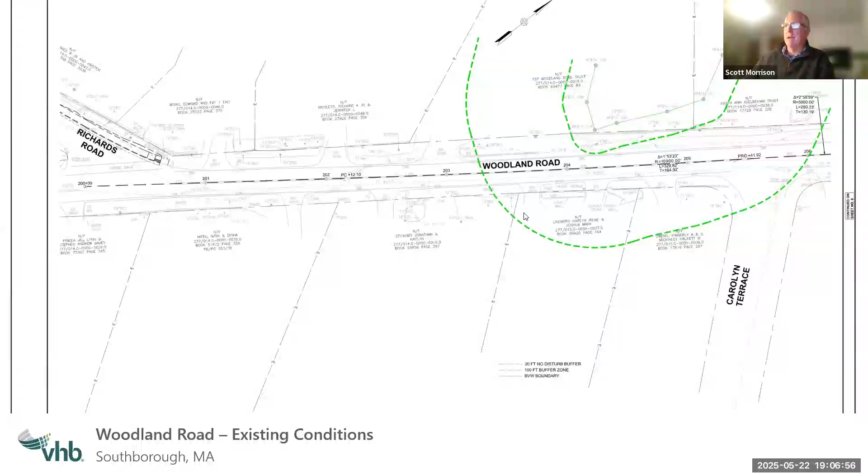So the work consists of construction of a sidewalk connection from Richards Road, crossing Woodland Road, and then running along Woodland Road up to Carolyn Terrace. So they'll need to do some improvements to the driveways and, obviously, construction of the layout of the sidewalk.

It should be noted that we need to provide updated plans, but within the buffer zone we've shifted this sidewalk slightly further away from the roadway so there'll be a grass area in between. The intent was to save some of the trees located along the edge of the road. So they'll need to install the sidewalk, and then these sections of the driveways will be saw cut and replaced to make sure it's accessible.

So that's essentially the relatively simple project. This one, again, is just the buffer zone project. I'd be happy to answer questions if the commission has any at this point.

Thank you for sharing this. I live on another part of Woodland Road, so I was able to drive by and try to understand what's going to happen. I just want to clarify, when the sidewalk crosses over what looks like a driveway, when people are driving out of their driveway, they're going to drive over the sidewalk, is that right? Essentially, the sidewalk will be shaped so it slopes into the driveway. The driveways will be saw cut and the pavement replaced to match the elevations of the sidewalks to make sure it's ADA accessible. But for all intents and purposes, it'll just look like an asphalt driveway to each of these homes. Thanks for the clarification.

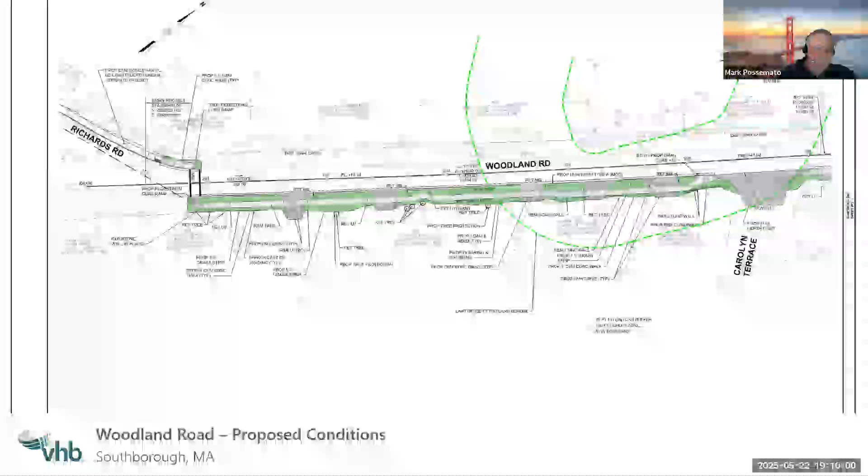All right, so we can talk about this a little bit in a continuous fashion. I'm going to open up 7:10, notice of intent, Richards Road. So, in accordance with the Wetlands Protection Act, Mass General Laws Chapter 131 Section 40, the Southborough Wetlands Bylaw, the Southborough Conservation Commission will conduct a public hearing on Thursday, May 22nd, 2025, at 7:10 p.m. by a virtual Zoom meeting. The commission will conduct a notice of intent for a project located within the right-of-way along Richards Road, between the intersection of Cordaville Road easterly to Woodland Road. The applicant, William Cutoff, Southborough DPW. The project description is the installation of a sidewalk along the north side of Richards Road.

Does anybody have any specific questions regarding this section of the project? If not, I'll switch over to the other slide deck. Well, I kind of do - is the intent to have these done at the same time? That's likely, yeah, Greg can jump into this. I would assume that would be the intent, but we had these separate, just in the event they got bid as separate projects and ended up with separate contractors.

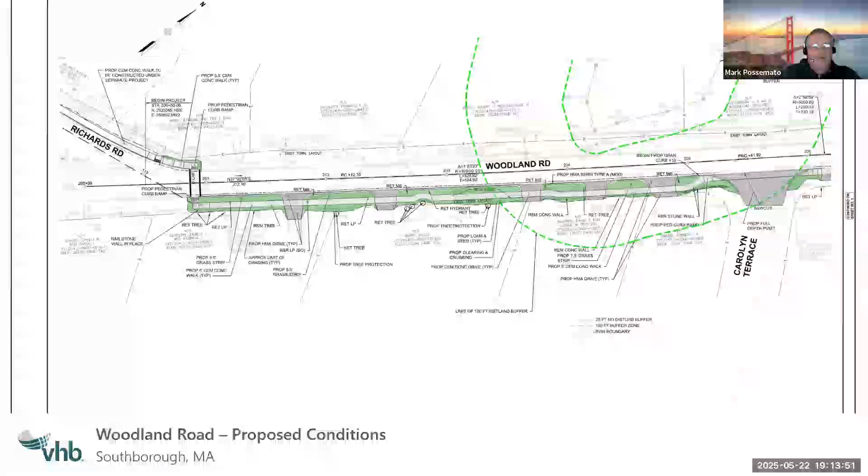There is an existing crosswalk at Woodland, on the west side of Woodland, so we could potentially end it there and the one on Richards there and carry on, or vice versa. Or build one and never build the other? I don't think that's the intent. But yeah, I get that, but things happen. Oh no, I understand.

All right, so that's why I kind of want to talk about them together from my perspective. But if you want to go ahead and present the Richards piece, or if any other commission members have anything to ask with respect to the Woodland piece, I guess you can do that now, and then we can hear about the Richards piece.

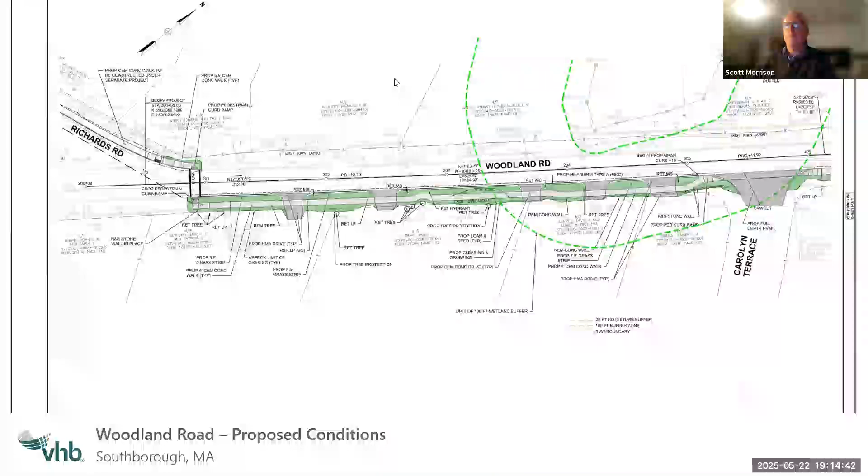So again, the Richards Road is an extension from the existing section. Sidewalks again provide a safe place for pedestrians. The proposed sidewalk will be on the north side of Richards Road from Cordaville Road to Woodland Road. Additional crosswalks connect the sidewalks on Cordaville Road and Richards Road. The sidewalk network will lead to the Mary E. Finn School.

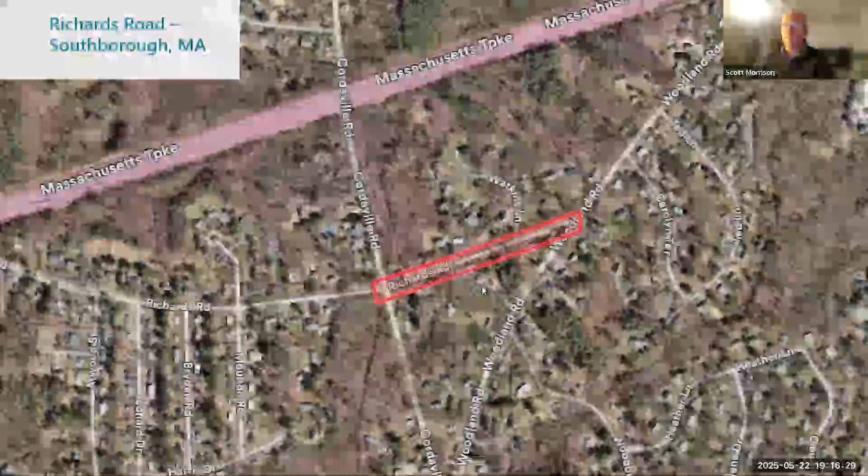So getting to the project layout, again, the section we just talked about is Woodland Road here. This will connect from Woodland Road down to Cordaville Road with some existing sidewalks through here. There are two perennial streams. One you can see flows down, comes through at this intersection and continues on. There's a second stream that cuts through and comes out this way and continues on. So those are the two wetland resource areas we're dealing with here.

Just to get you oriented, this is Richards Road here, Cordaville Road. So we've got a perennial stream that crosses this intersection through a culvert. The second stream flows through a culvert and is piped down and discharged in this vicinity.

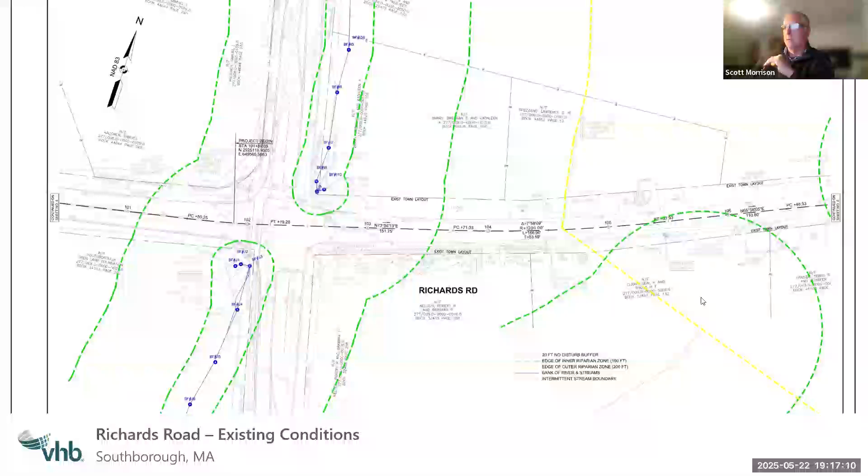One of the comments in the peer review comments was requesting that we add some flags in this location to identify the specific area that was done. We'll provide those on some updated plans, but I can go through the process here.

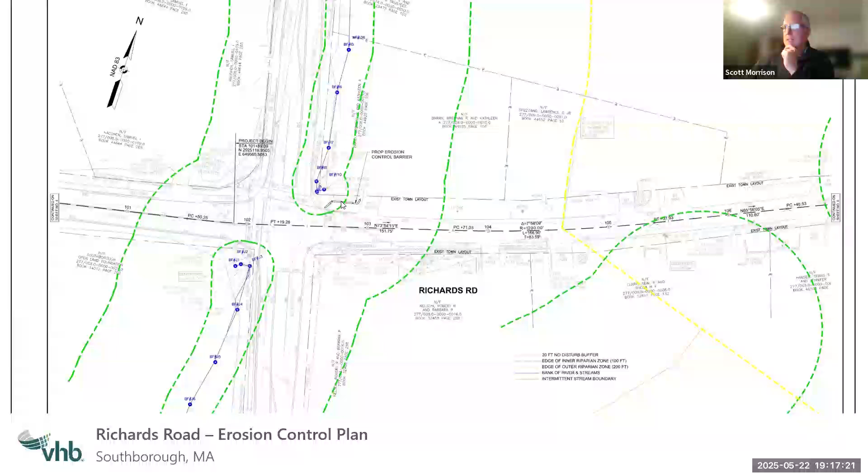So we'll have erosion controls consisting of straw wattles and silt fence barrier at this intersection to protect this wetland resource area here.

The project will consist of crossings, a section of sidewalk, an additional crossing across the road, and then sidewalks along the northerly side of Richards Road here. There is a small portion at this intersection that's within the town's 20-foot setback required to get this sidewalk crossing at that stop sign there.

There's also another section, a very small area of impact within that 20-foot zone. We did request a waiver based upon review of the bylaw - it's allowable for a waiver if the action is in the public interest and not inconsistent with the intent and purpose of the bylaw.

So again, these areas where we're proposing sidewalks, the vast majority are kind of roadway shoulders that are either gravel or a combination of gravel and grass along the edge of the road.

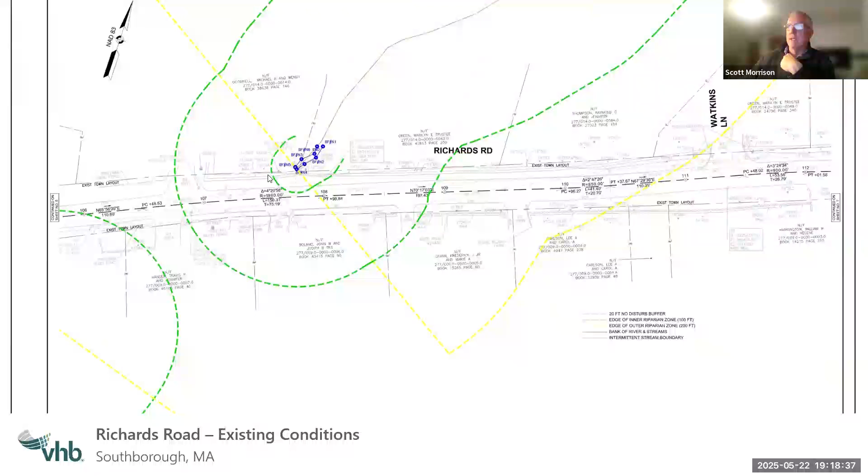The second stream, as I described, flows through into a culvert, crosses, comes down, and then discharges over here. So again, we'll have erosion control barrier along the edge of the roadway here. There's an existing retaining wall along here too, which will also serve to protect that resource area.

So the proposed work within the buffer zone will consist of reconstruction of a portion of an existing driveway, and installation of the sidewalk, crossing through. So all the work would be located within either the riverfront area or the 100-foot buffer zone in this particular project. I'd be happy to answer any questions.

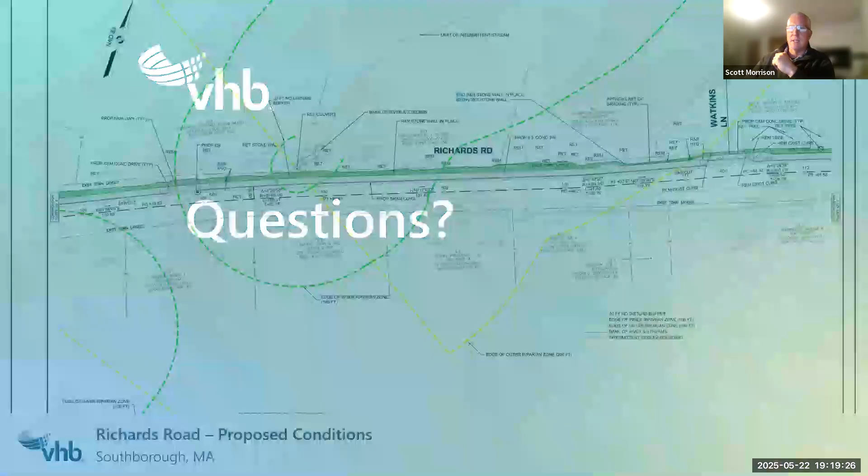Again, we don't have a file number, so we need to continue. We've got a handful of peer review comments to address, mostly regarding the numbering system or the flags. We'll make those corrections and get you an updated plan before the next meeting. But I'd be happy to answer any questions the commission may have.

Okay, thank you. I'll open it up to any questions the commission may have here.

So I had a question on the eastern stream - I saw that was just labeled as intermittent, but in the write-up it was described as perennial. Is it? It's mapped perennial - we'll make that update to the plan sheet. I think looking at it, I suspect this may in fact be intermittent. There's just a trickle of flow now, but because it's mapped, it's presumed a perennial stream. So we'll update the plans and address that. Okay.

Do you believe the mapping may be incorrect? Well, the mapping comes from the old USGS maps, so if it's mapped perennial, it's presumed perennial, unless deemed differently by evidence. Yeah, and for a project like this, it's not worth prolonging the project trying to document the stream being dry. There's a limited project provision that allows for roadway improvements such as this, so it's not important to the project and not worth a delay and extra effort. Okay.

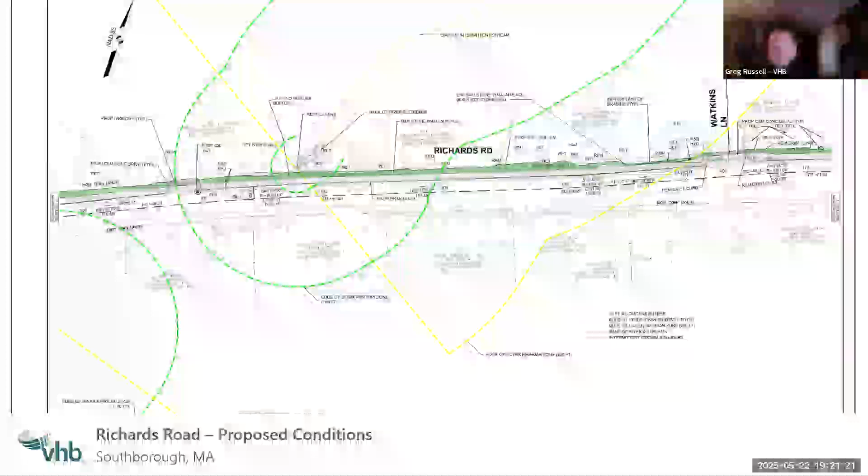Once you have all the permitting in place, how long would it take to complete the project? Construction-wise, once a contractor is selected and mobilized, probably both of these, you're talking a couple of months. Thank you.

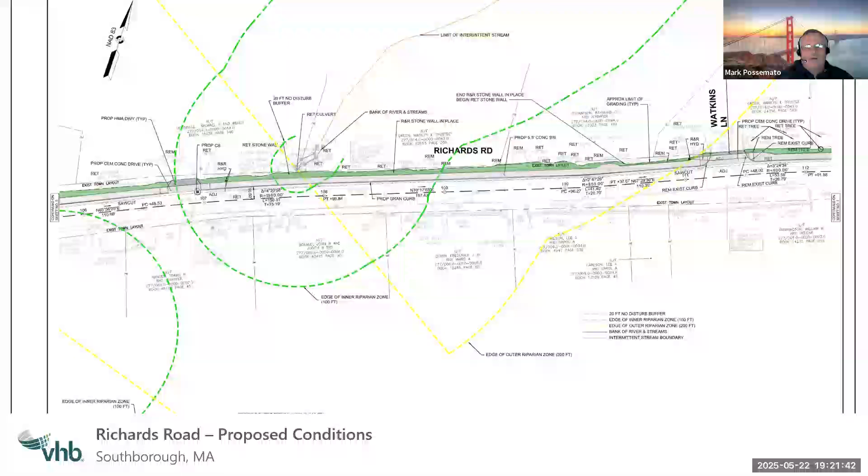Our consultant from Lucas Environmental, any comments here that you want to provide or add? Maybe just briefly touch on a few things.

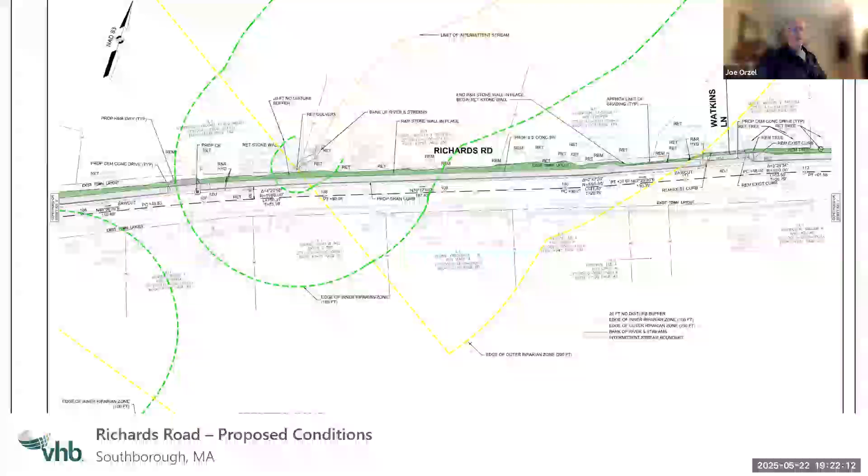As was noted, the culvert end and the southern portion of the stream that's showing now is closer to the road than what was estimated on the plan. And it appears that it would make the distance between the culvert ends less than 200 feet. Therefore the riverfront area would not be a straight line as indicated on these plans, it would be continuous. That would just impact the riverfront area of the site, and the riverfront area being impacted.

As we noted, there are a number of issues with the flagging. The locations were generally okay, I just mentioned it makes it difficult for me and more time consuming to go searching for flag numbers that are non-existent, and trying to figure out which flags correspond to the flags on the plan.

With regard to Woodland Road, I think the primary item I would like to mention is that there's an area not shown on the plans, which appears to be an isolated vegetated wetland that actually occurs in lawn area near I think it was 129 Woodland. It's mowed lawn. At the time I looked at it, it had at least a foot of water standing in it, and it was approximately 500 square feet of ponded area.

It does have hydric soils. There is a constructed swale that sort of goes between that area and the catch basin, but it's kind of an odd situation where the swale is actually up gradient of the pond, so I don't think that swale would be considered jurisdictional in any way. But it would include some additional buffer zone on that portion of the project.

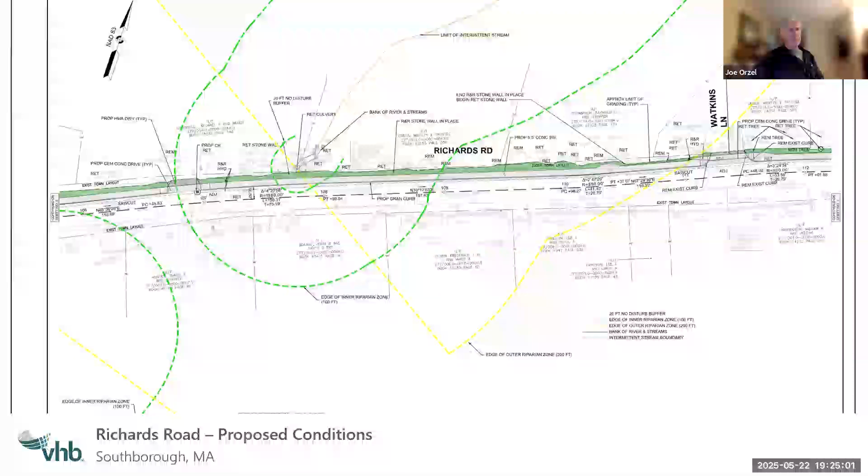I think other than that, just generally, there were some comments on providing some information, maybe just some information on alternative analysis on why the work could not be moved outside of the 20-foot no-disturb zone. It may be obvious, but it may not be. I think just a little narrative on that, or a little discussion on why that couldn't happen, would be good for the record.

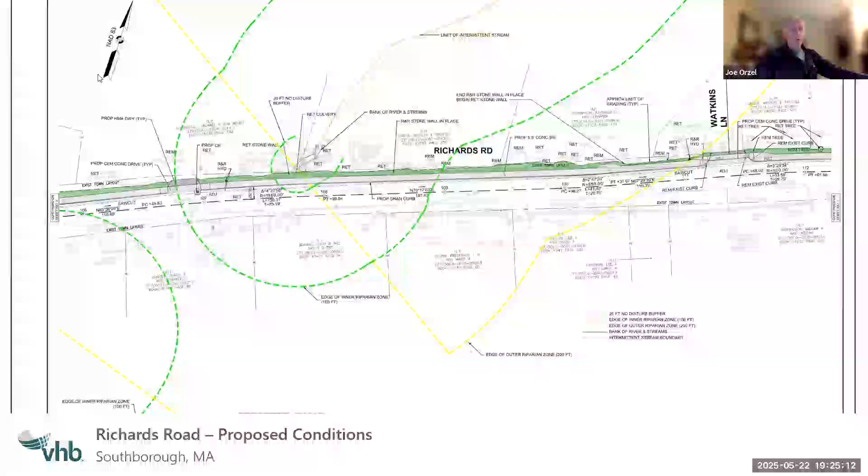Yeah, we can provide a narrative, but if you look here, the intent is to try and, for safe pedestrian passage, it's best to do it at a traffic signal. So if we were to pull this back, it would essentially be in a location where you'd have cars stopping, which could perhaps create an unsafe situation. And this is a traffic signal, so it needs to be within a certain distance of the traffic signal.

So that was kind of the main reason why it's up there, and then you start getting into the driveway as you start moving closer to it. So that was partially why we kept it there. Ideally, we could have kept it on the other side, but the south side is where all the utility poles are, there's several larger trees, stone walls. It seemed after going through it and with the grading that it made the most sense. We were able to do it on the northerly side with, we'll say, lesser impacts to abutters and the overall roadway. But we can add that, we can definitely add that to the narrative.

Has a waiver been requested for the 20-foot in this application? Yes, the notice of intent includes a waiver request, and we provide a narrative discussion of how that's allowable. As I indicated earlier, it requires that it's in the public interest. Providing safe pedestrian access is certainly in the public interest. The other thing too, to keep in mind, which isn't required, is that it's within areas adjacent to the roadway, which are kind of mowed roadway shoulders or gravel roadway shoulders.

I'm rather pleased to see progress on this. I live on Woodland Road and I walk both Woodland and Richards, but I'm kind of surprised by the choice of routing for several reasons. As you noted, there is an existing sidewalk on the west side of Woodland, south of Richards, and connecting requires a pedestrian to cross. I do it every day, but it's a busy road, and you're not likely to signal that. So that sort of didn't make a whole lot of sense to me.

The other thing is by going on the east side of the road, it means you have to cross both Ted and Carolyn, which you wouldn't have to cross if the sidewalk were on the other side. And then down at 85, there is no call button on the south, southeast corner where one has to cross. So again, you're having people cross Richards to get to the call button, to get across the road, to cross Richards again. I understand there might be logistical reasons for wanting to duck permits and other things, but just from the point of view of someone who likes to walk in a straight line and not cross the road any more than he has to, this seems a little strange to me.

Yep, no, I understand your points. With regards to Richards Road, the signal will be modified to provide push buttons in the pedestrian phase for all crosswalks as part of this project, so that straight line is favorable. This is the best way to do it without major changes to the culvert at the corner at this time. At the north corner, there's a consistent issue with flooding around where the push button is. Okay, so we can take a look at that and see if we can address that in some way.

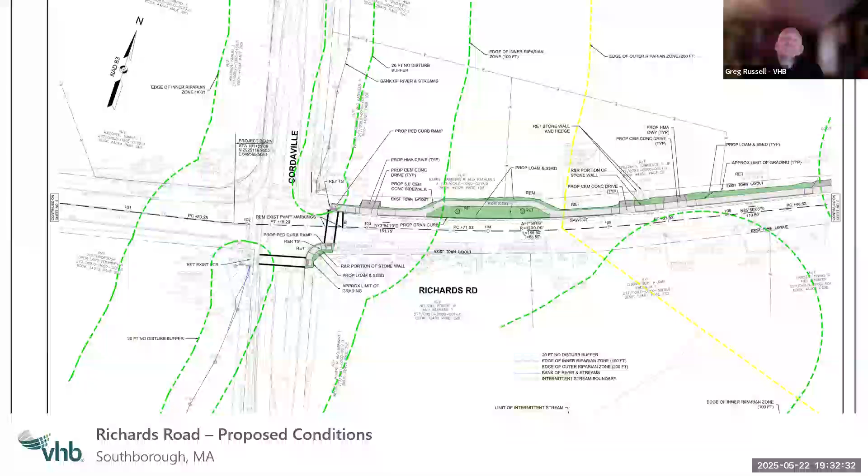As for Woodland, it's kind of a similar reason as here: the utility poles are on the other side of the road. The roadway drainage currently just flows off the side of the road. If we were to put a sidewalk or curb on that side, it would result in having to do a new drainage system and reroute the existing drainage, which we were trying to avoid. Whereas on the east side, there are existing drainage systems we can tie into. So that's the reasoning behind that selection, and again, cost when it comes to moving utility poles, which also impacts trees and the overhead wires and having to trim the trees.

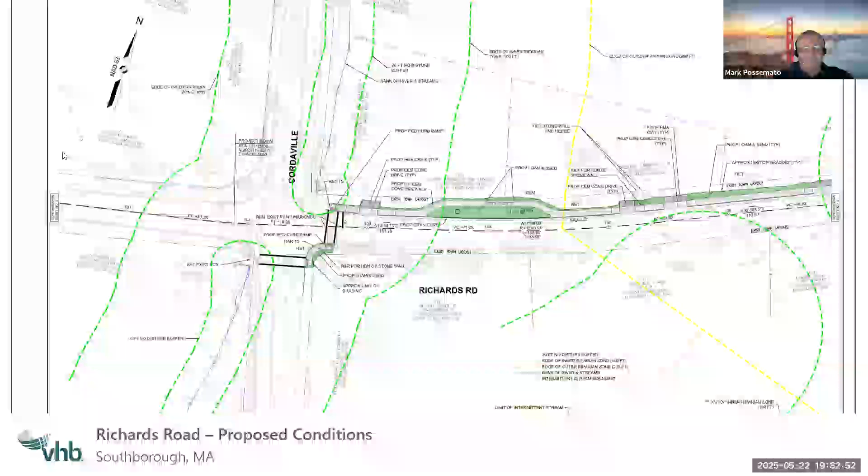All right, thank you. Any other comments from the public? I have no hands raised. No hand raised, okay. All right, so we will continue this in the next meeting, which is June 12th.

Okay, do I hear a motion to continue? I have to do these separately - the notice of intent for Woodland Road. So moved. Do we have a second? Second. All in favor? Zulik, yes. Farrington, yes. Upton, yes. Barbary-Glovsky, yes. Possemato, yes.

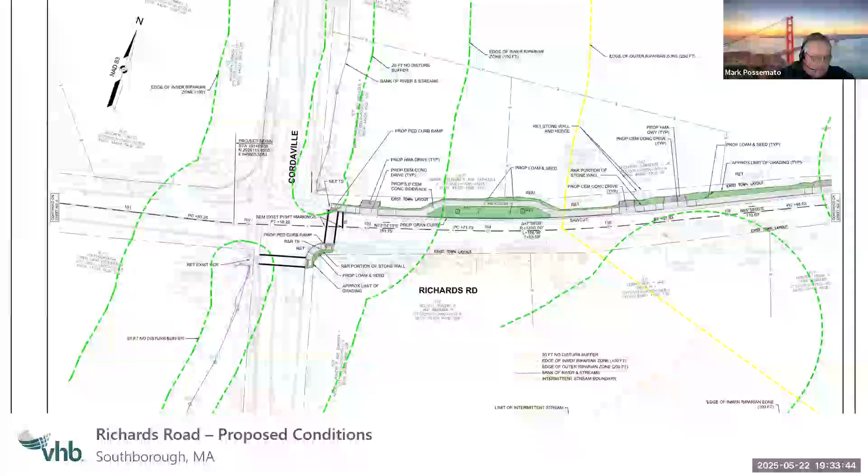Okay, we also need to continue the notice of intent for the 7:10 PM NOI, which is Richards Road, ROW. So moved. Is there a second? Second. All in favor? Zulik, yes. Farrington, yes. Upton, yes. Barbary-Glovsky, yes. Possemato, yes.

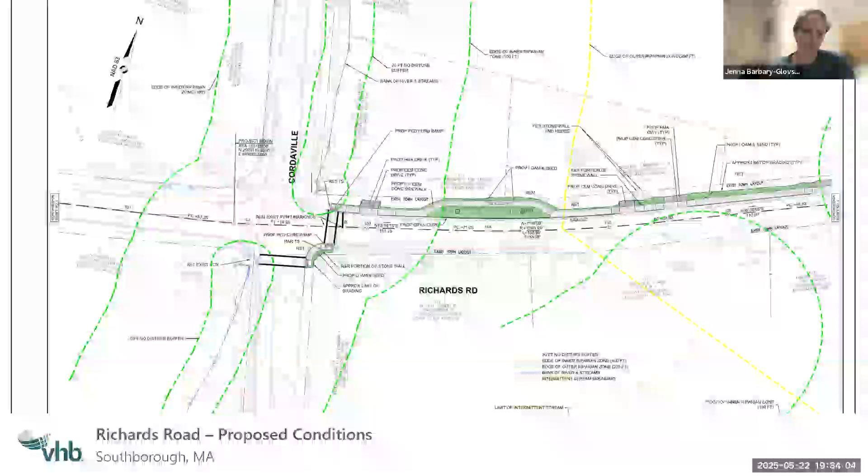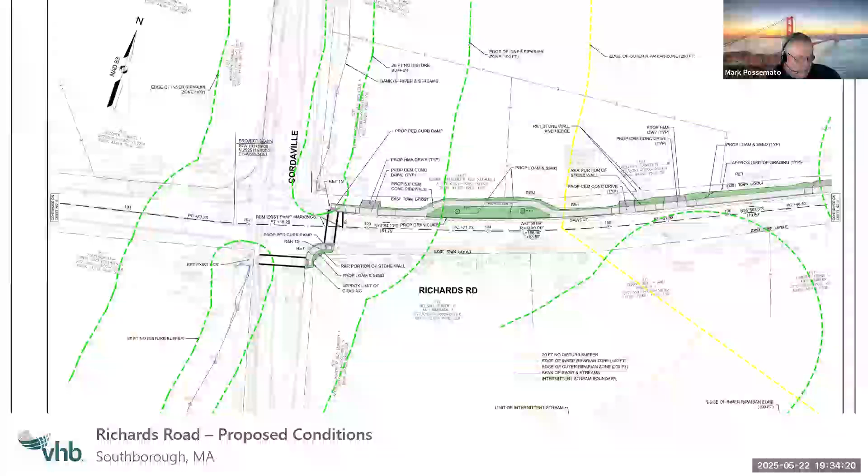All right, next up is notice of intent, 45 Southfield Road, map 4, lot 27, to upgrade septic system and construction of an addition and associated site work. In accordance with the Wetlands Protection Act, Mass General Laws, Chapter 131, Section 40, and the Southborough Wetlands Bylaw, the Southborough Conservation Commission will conduct a public hearing on Thursday, May 22nd, 2025 at 7:20 PM via virtual Zoom meeting. The commission will consider a notice of intent for a project located at 45 Southfield Road, map 4, lot 27. The applicant - hang on a second, I'm making a mess of this.

The project description is to upgrade the septic system, construct an addition, and other related site work. I apologize for the name. Alright, Vito Colonna with Cornerstone Engineering, here on behalf of the applicant.

So last time we continued, I think we were missing a DEP file number, and we just had to clean up some of the plans for Lucas's review comment. We did get the DEP number, it actually came in the day after, and there were no outstanding issues with that. I think we made the revisions. I'll share the screen for the plan. So I think we made all the revisions needed to address Lucas's comments.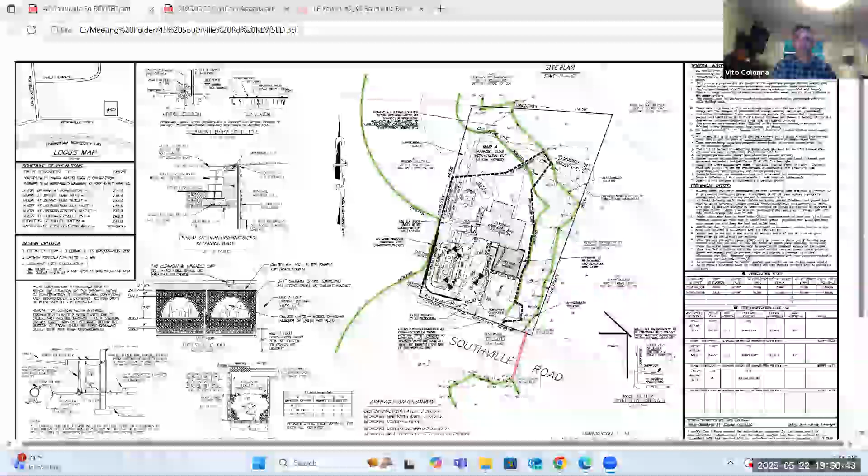There were a couple other minor notes - we added some silt fence along this side. But other than that, there's really not much to report. A lot of it was getting the DEP file number. I don't know if you want me to go back through any of the project at all, for anyone who wasn't here, or if anyone just wants a refresher, I can do that. Anyone?

So you have a revised plan with comments, and it was sent to Lucas Environmental. Joe, do you have any comments? Well, it looks like all of our comments were addressed and we have no new comments. So you're satisfied? Yes. Good.

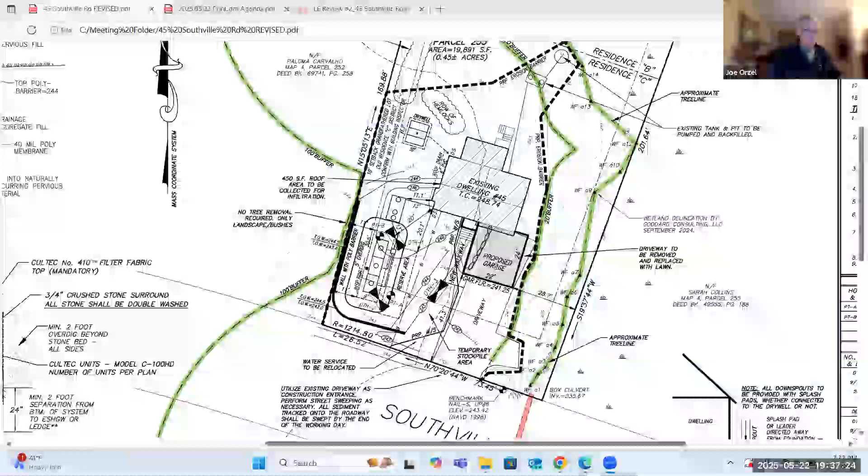Okay, so is there any updates or comments or questions from the commission? Okay, not seeing anything. Any comments from the public or questions? I have no hands raised. No hands raised, okay. So I think at this point we can close the hearing. I see no reason to continue this for any other reason.

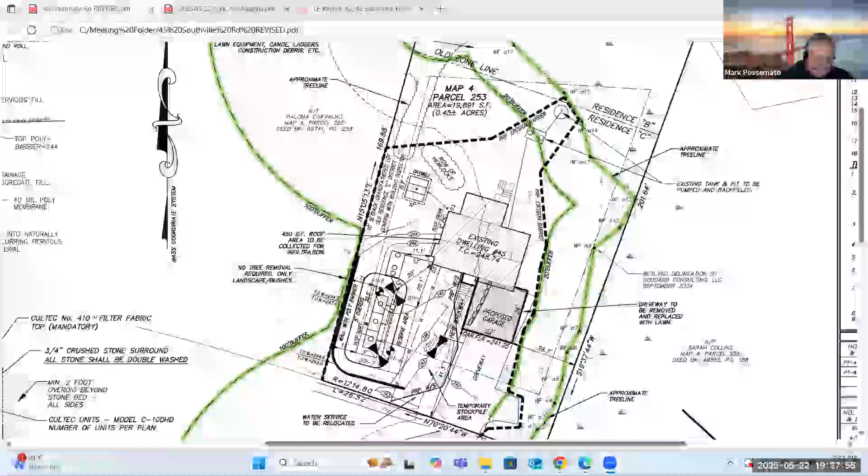So for the NOI on 45 Southville Road, we hear motion to close. So moved. Is there a second? Okay, we have a second. All in favor? Zulik - oh, we have a third. Yes, awesome. Farrington, yes. Upton, yes. Barbary Glowski, yes. Possemato, yes.

Okay. 7:30, let me get my paperwork straight here. All right, so 7:30, we have stormwater management permit, 48 Main Street, map 53, lot 11.

In accordance with the provisions of the Southborough Stormwater and Erosion Control Bylaw, Southborough Town Code Chapter 154, the Southborough Conservation Commission will conduct a continued public hearing on Thursday, May 22nd, 2025 at 7:30 p.m. by a virtual Zoom meeting. The commission will consider a stormwater management permit for a project located at 48 Main Street, map 53, lot 11, for applicant Fay School. The project description is the construction of a building addition.

Okay, and we have Chris Hodney here from Niche Engineering, who is the representative for the applicant. Hi, like Laura just said, Chris Hodney with Niche Engineering, here on behalf of the Fay School. So we've continued this a few times without actually coming to a hearing. I think the first time there were kind of two things - there wouldn't have been a quorum anyways for this project, but also we still had some outstanding peer review comments. And then at the prior hearing, we also still had some outstanding peer review comments. So we've been working back and forth with Fuss and O'Neill.

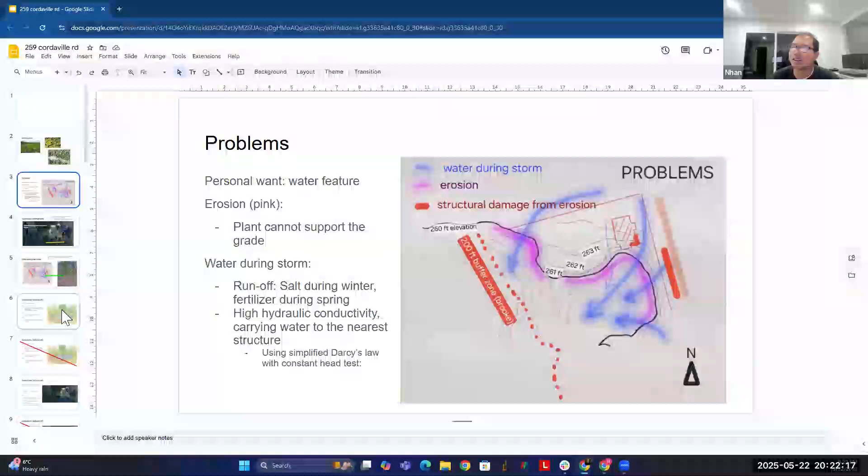So this is what I'm drawing. This is the road, the Cordaville Road, and this is where the water flows when there's a lot of rain. What I'm trying to do is first think about having an artificial pond, basically trying to put in liners and get a pond in this area.

But the problem is it's very close to the road, and there's a lot of pollution runoff from the road. Sometimes when I try to put fertilizer, it just runs off and goes to this area. So I don't think that's a good idea to put a pond in that area.

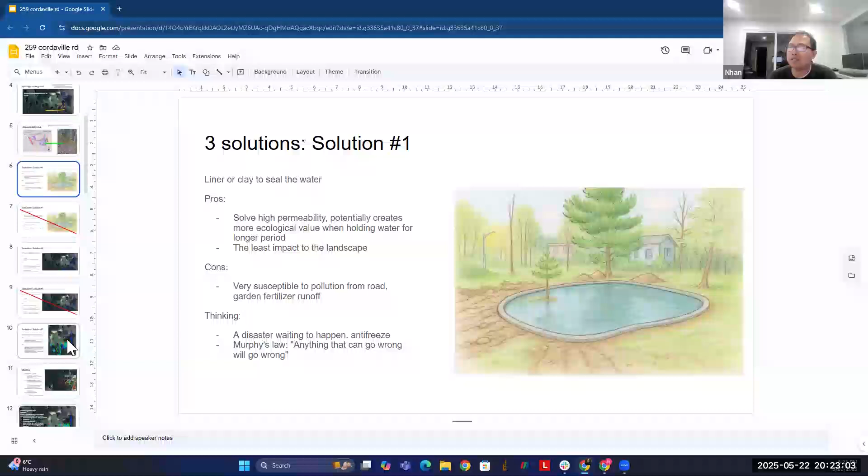So what I've been trying to do is have a permaculture garden. Basically it captures a lot more rainwater, and I don't have to water so intensely every summer and during the drought.

So what I'm thinking is to have slopes that gently go about a 2% grade, going approximately in this direction, and trying to build berms that actually let the water...

Sorry, do I bother you? Do I bother you? Yeah, but I'm not following. Everyone, actually -- whether I'm straying off from the points or...

No, I'm getting an idea as to what you're trying to do, which is you're trying to build some features in your backyard that resemble something from your homeland -- Vietnam -- which had grasses, some water, some fish life, aquatic life, and some sort of man-made pondage of water that you're trying to create. Jump in if I say something wrong. That's correct, yeah.

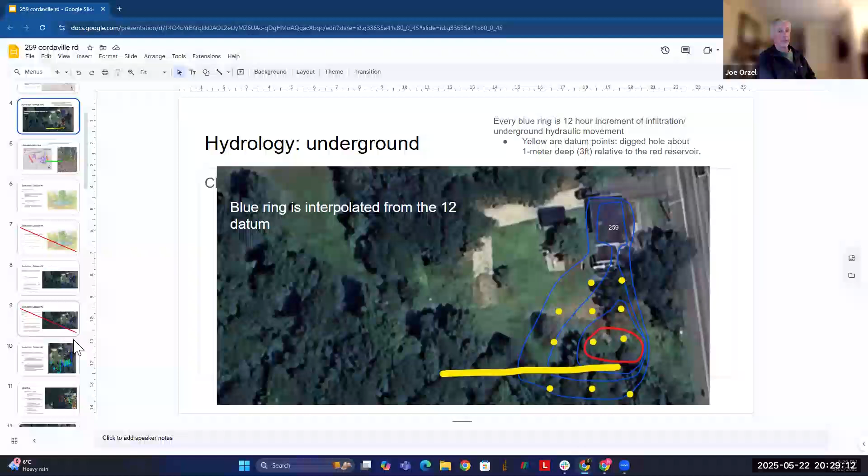I see. So your concern is if I start building the features that capture the water, it will affect whatever wetlands or water features are behind in the back of the property. Well, that's one potentially.

The project you're wanting to create or build is to impound water for some period of time to allow aquatic creatures to be able to survive and live, probably meaning they have to have water all the time.

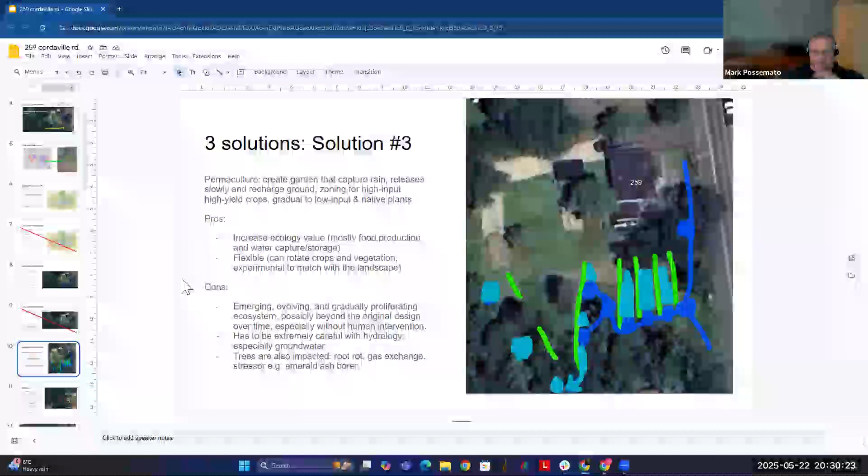There's a wetland down in the back that we, as a conservation commission, have responsibility to make sure that wetland and anything around it development-wise does not impact it, and if there's any impact, that it's mitigated. So if you're going to impact it, we have to make sure that you mitigate that impact.

I understand it's your property, you pay taxes on it, but there are limitations with respect to laws and things we have to uphold and have responsibility for, to make sure we're responsible to the little critters that live in that wetland in your backyard.

There are offsets from that wetland that we have to make sure are maintained, mitigated, taken care of. Whether it's just a wetland, it's a 100 foot buffer zone. We have a bylaw that says within 20 feet of that, there are more restrictions.

If it's an intermittent stream, there are more restrictions. If it's a perennial stream, there are even additional restrictions. So all that comes into play.

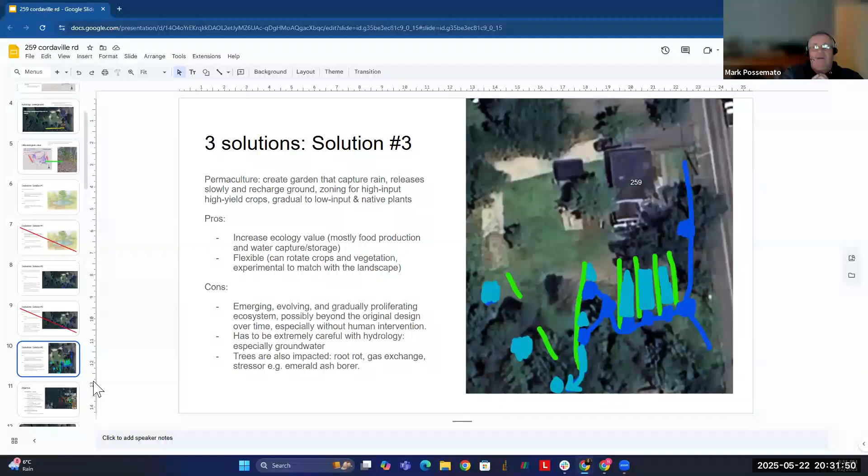I know that from Richards Road and Route 85, there's a stream that runs through. It actually has a historical bridge over it, that runs down through and behind your property. I don't know how far it is behind your property based on where you live. That continues down and eventually goes into the Sudbury Reservoir - I mean, Sudbury River.

So the reason why you were reached out to, to find out what's going on, was with respect to that wetland in the back, and your work and impact to that. I see.

So I understand there's a 200 foot buffer zone on the brook you mentioned. That's for a stream, yes. But yes, the brook is in the back of the property.

There's a stream, there's a riverbank, and there's a wetland associated with that stream that goes out some distance, usually identified through soil testing. That's why we have a consultant like Lucas Environmental that goes out there and takes soil samples to determine whether or not the soils contain wetland indicators, and that determines where the wetland line is. From there, it's 100 feet that is considered the buffer zone.

But generally, when we see plans like this, they usually are supported by independent engineering professionals with experience helping us understand where the boundaries are and what the plans are, so that if there's any concern about impact on the wetland, we know the plan is going to be fine. So I know you've put a lot of work into these slides. It's clear, and also in the plans for your property, but it is missing a critical connection to what we would need to understand as commissioners. And that's why we're not feeling comfortable with what you've shared in light of our responsibilities.

So, as I understand it, the only way to resolve this is to have your consultant go and take a look at the property and determine whether it has an impact on the area behind the property.

That's not the only way, right? The other way would be for the applicant, you, to have some sort of professional — you used the term engineering — come in with design drawings to indicate what you're trying to do, right? And we would either decide based on those design drawings whether there was a negative impact on the wetlands, which falls within what we call a Request for Determination of Applicability, RDA, which we would then determine, like, no, it's all set, there's no impact, they can go ahead and do whatever they're planning on doing. Or the RDA triggers what we call a Notice of Intent, which then drives a need for a permit. And we're not a preventing board. We are a permitting board, as long as the design requirements and mitigation requirements of the Wetlands Protection Act and the Southborough Wetlands Bylaw are met.

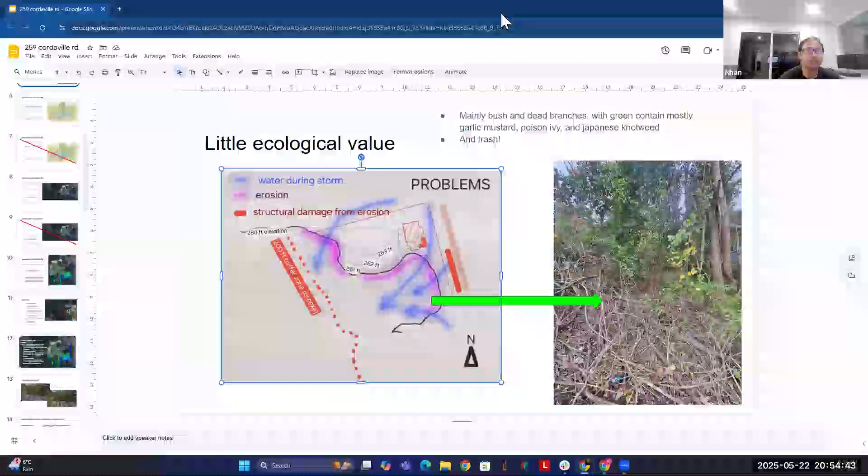Yeah, and I do want to thank you for coming in and sharing your plans, your ideas. Thank you for inviting me.

I think I get the questions. Can I also ask one last question? Sure. I was just wondering what triggers—so the fill was the trigger of your concern on the impacts to the wetland. Is that correct?

So there was the fill—looking at your property on the left side, there were multiple mounds of dirt fill being brought in. And also the residual tire dirt tracks on Route 85 left by the vehicles.

When we have projects in town with fill coming in and vehicles leaving, we have a responsibility to make sure the asphalt isn't left in a state where, when it rains, that dirt finds its way into a drainage grate. As I mentioned, I had people ask me what's going on at this property, since there are wetlands in the back—have they been brought before you? That sparked some interest for me to reach out and find out what was going on.

So this is our approved plan under the current order. You can see this zone line just kind of cuts through the building here. So they're looking to shift it up just a little bit so that the entire building would be within this industrial zone.

Are they changing any of the elevations? I don't think so, I think it was just a shift up. The good thing about that is more of the building will be outside of the buffer zone. But they didn't tell me about any other changes, it was just a scooch of the building. That's a technical term, a scooch.

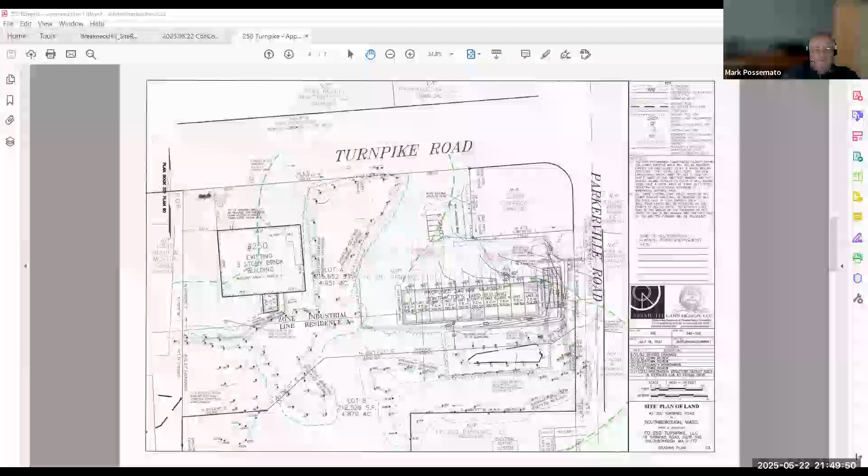A scooch. Their septic is under there though, right? In front of that building. So would they have to move that? That's a great question, I would think so. Oh, I'm guessing probably not because, well, we put septics underneath driveways. But Kevin, good point.

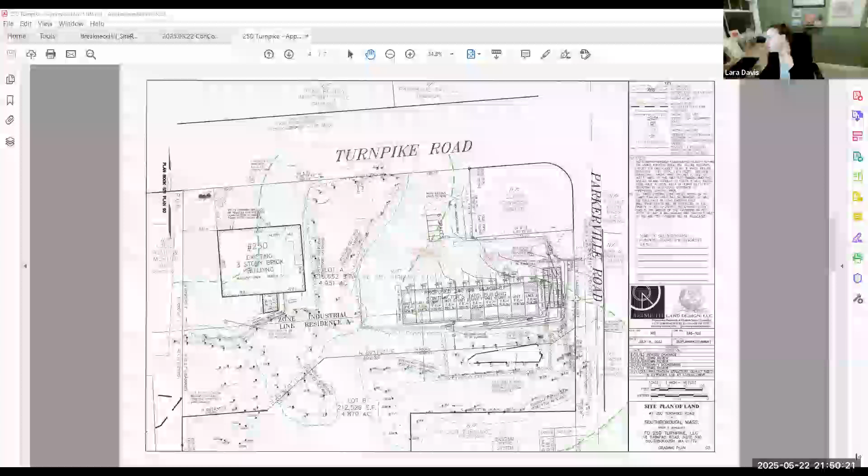It's moving in the right direction, right? It's out further away from the wetlands. And then there's the detention basin there on the right, that rectangle. Up just a little bit from your cursor, right there. Yeah, so I don't know if that's being impacted at all because some of that's in the commercial zone too. They probably need to come talk to us to determine whether it's a NOI or just an administrative change.

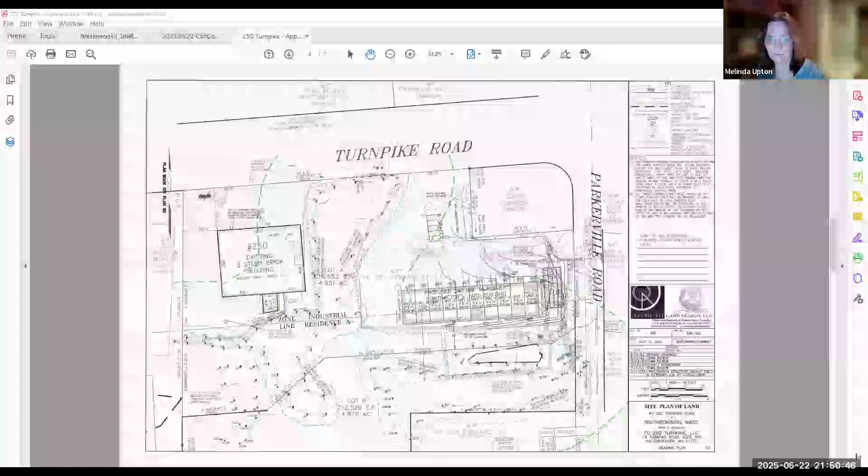I think we have questions as to the detail here. I will let them know. We can do that. Did they say why?

I think, if I recall correctly from some zoning conversations we've had, there's concern with the neighbors about having this commercial use within a residential zone. There was a special permit from, I think, the 1980s, that said there was going to be no construction in the residential zone, which makes the 40B proposal a little interesting, but that was a big concern for the neighbors - having this commercial use within the residential zone, because you have neighbors over here. And this is going to have a significant amount of traffic with the contractor trucks going in and out and materials being stored and stuff like that. So I think it's just to increase that buffer with the residential zone.

Yeah, so as we talk about this more, it's more than a scooch. We definitely want to have them come in. Because the 40B proposal is behind them, I don't believe the neighbor to the south of that building would care, because the owner of the building owned that house. I don't know if they sold it, what they did with it. The one in the corner, they didn't get. So good point, yeah, they should come in and talk to us. I'll have them do that, I'll have them come to the next meeting.

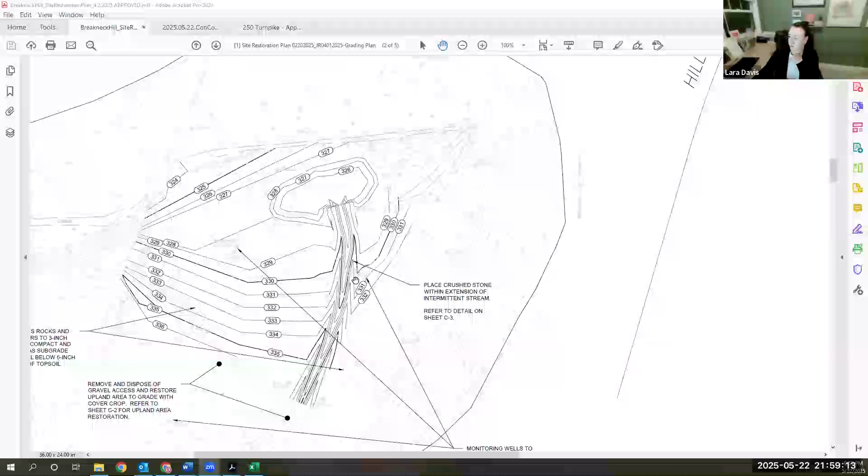Breakneck Hill, it was a roller coaster. So we started restoration this week, which was very exciting. And then this morning, Joyce notified me that a killdeer nest was found on the site. So the nest is, let me bring up the site plan so I can show you approximately where it is. The killdeer nest is somewhere in this area. This is an existing intermittent stream. This is what they're calling the pond because they're going to connect these and then this will be more like a ponded area. So the nest is somewhere in between here where it's not yet connected, but they need to connect it.

I am not sure how familiar you guys are with this species. I learned a lot today.

So this is a bird that's protected under the Migratory Bird Treaty Act. It gets a little complicated, but prior to April, you could not remove or disturb the nest. You could deter them from nesting, but you couldn't remove or disturb it. There have since been some environmental protection rollbacks with the federal administration, so that's no longer prohibited if it's incidental, but it's being challenged in the courts. So I was told today that it's kind of a legally gray area.

So where that leaves us is that we have a nest. We have 4 eggs in it. The incubation period starts once 4 eggs are laid. We do not know when the 4th egg was laid, so we don't know where in that timeline we are. But the total incubation period is 24 to 28 days, so we're somewhere in that realm.